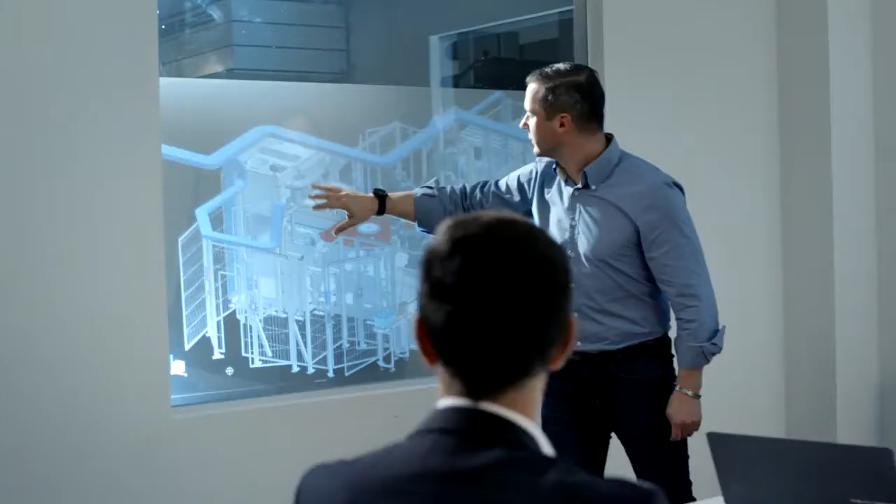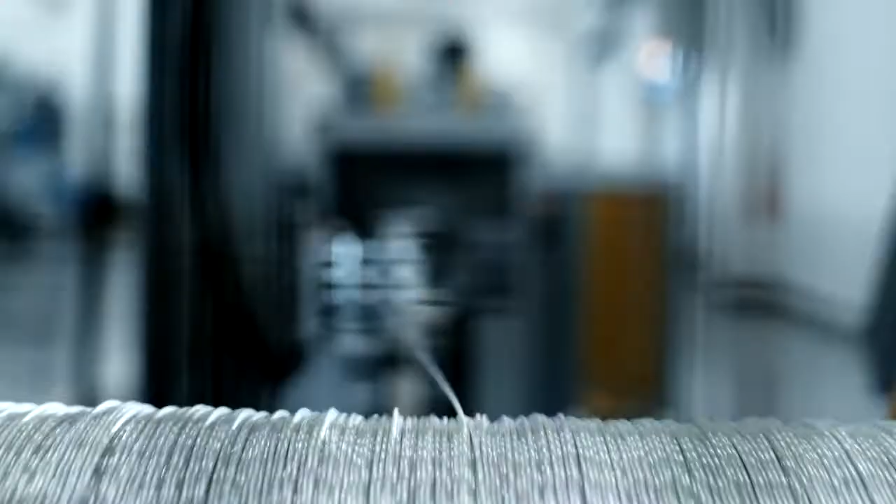Rosendahl Nextrom has 3 business divisions. We provide services for 3 industries. These are the glass fiber industry, the cable and wire industry, and the battery industry. The technology in our sectors is generally at a very high level. In other words, the solutions related to product manufacture are already highly saturated and extremely advanced.

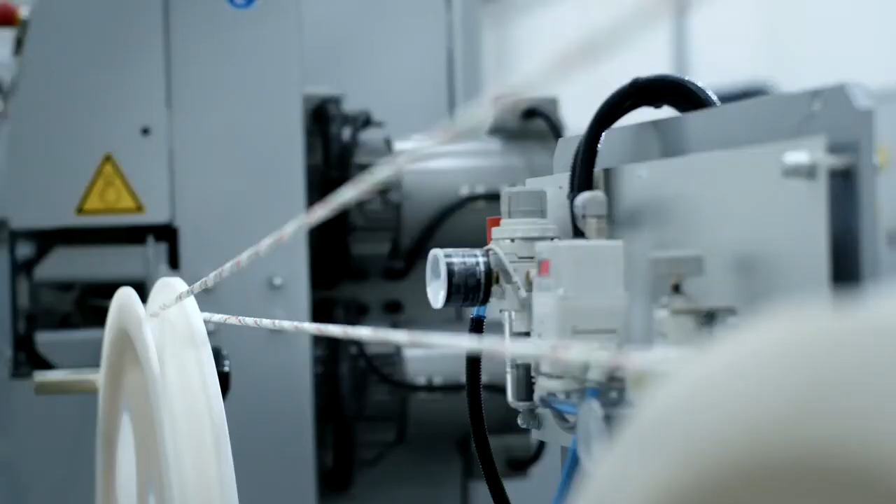And the focus is always on managing fast product life cycles, meeting higher qualitative and quantitative requirements, and keeping pace with competitors' products from low-wage countries. In addition, there's the challenge of simply always finding better solutions.

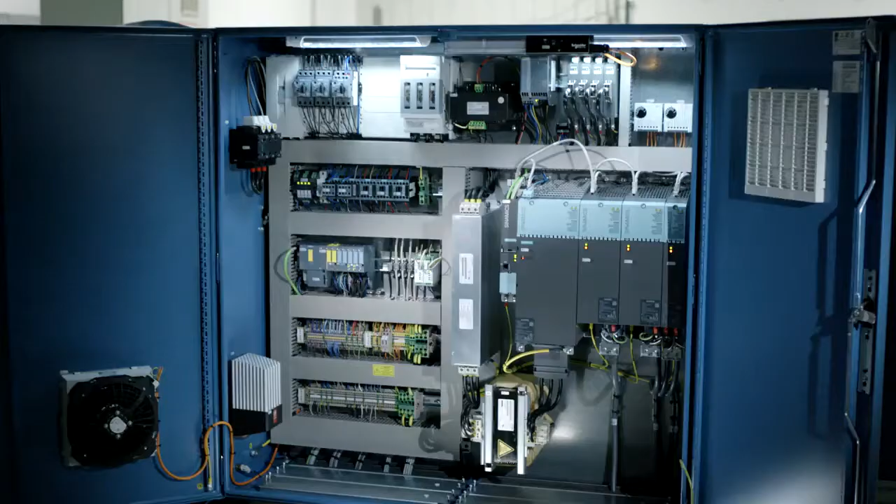We use our skills to combine mechatronic approaches with physics and chemistry in order to generate a better, more efficient manufacturing solution. In the past, we used traditional engineering methods as part of this process, and therefore always reached a limit.

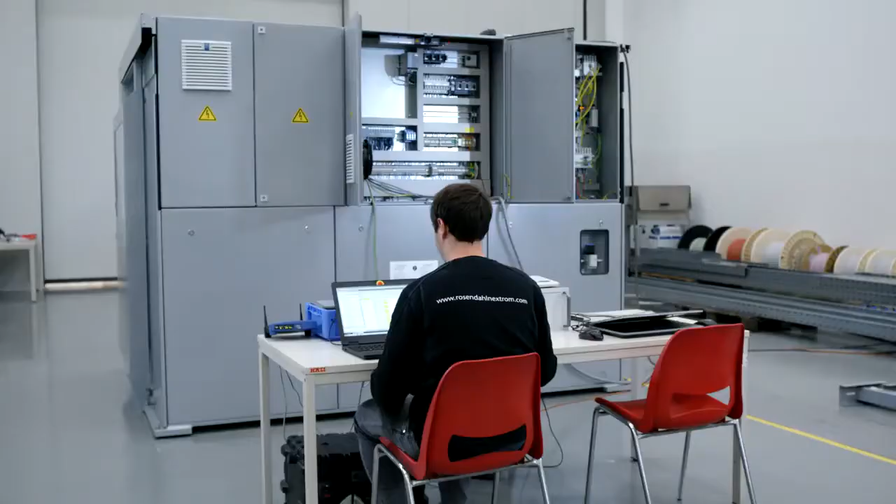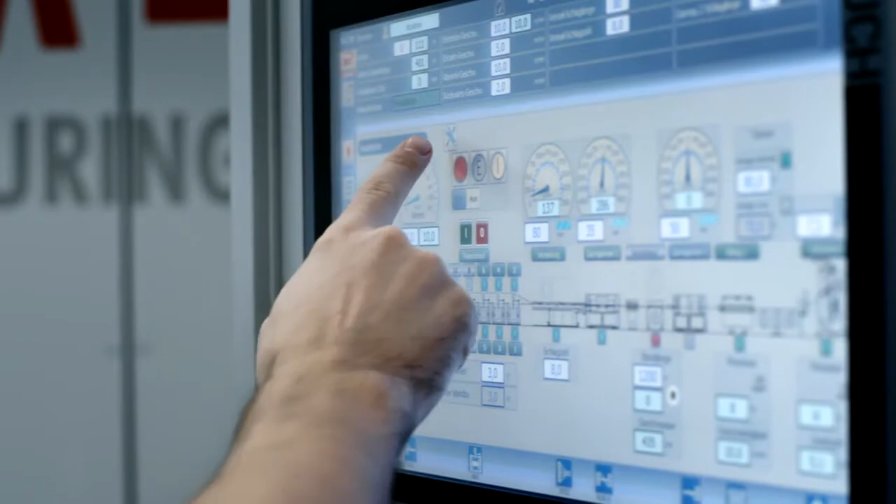Digital capture and simulation make it possible for us to go beyond the limits reached by traditional engineering methods and to create better solutions faster and more cost-effectively. Our digital twin is displayed to a considerable extent in Siemens products. This starts with Siemens NX, 3D construction, so that Teamcenter, which links key data elements together, remains interconnected.

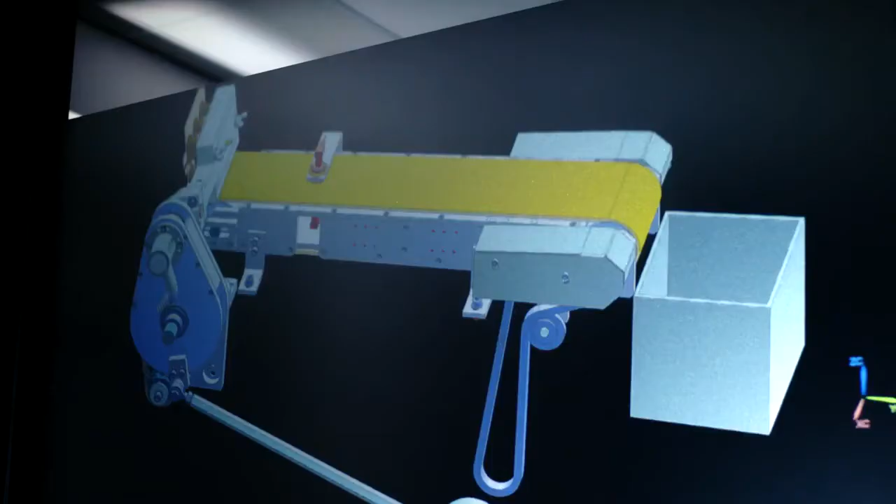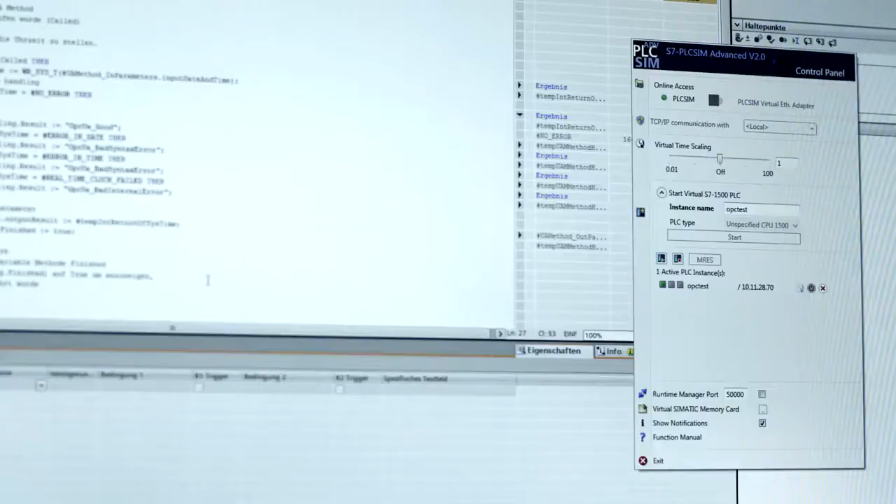We continue to use this in Mechatronics Concept Designer, where we move on to the simulation of the mechanical processes. This is also integrated with automation technology via TIA portal. We use plant simulation. Otherwise, our experts, clients, and other suppliers within the infrastructure can't even begin to imagine how these millions of components and their modes of action interact in the workings of a factory.

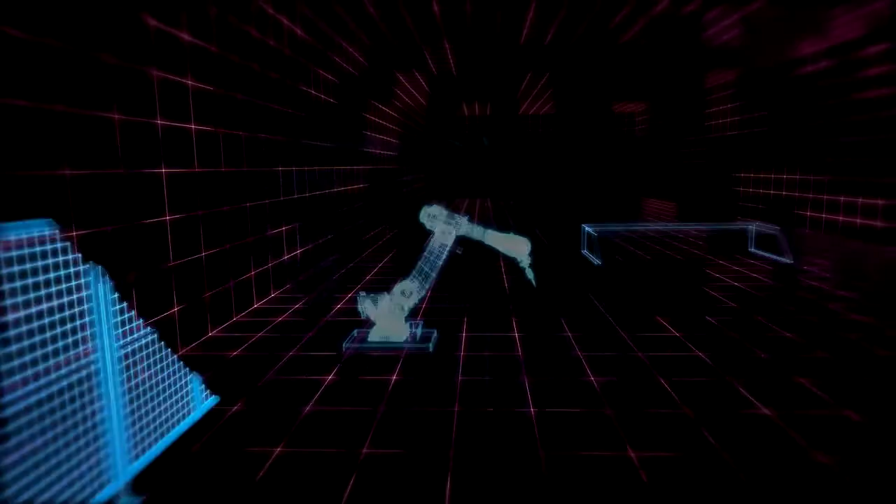We use 3D factory tours to demonstrate the factory concept to clients. A whole new kind of interdisciplinary collaboration takes place across various areas of expertise. The simulation makes it easier to perceive and understand a specific task as a whole, and this support helps our team to generate unique solutions.

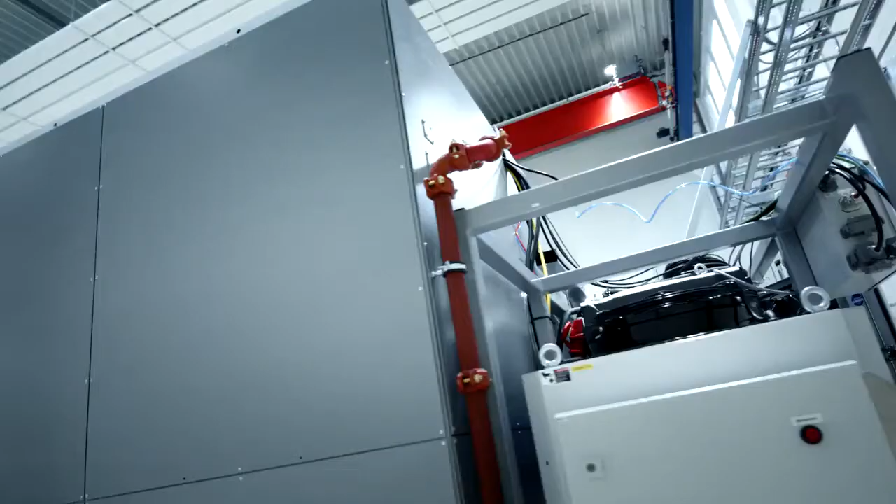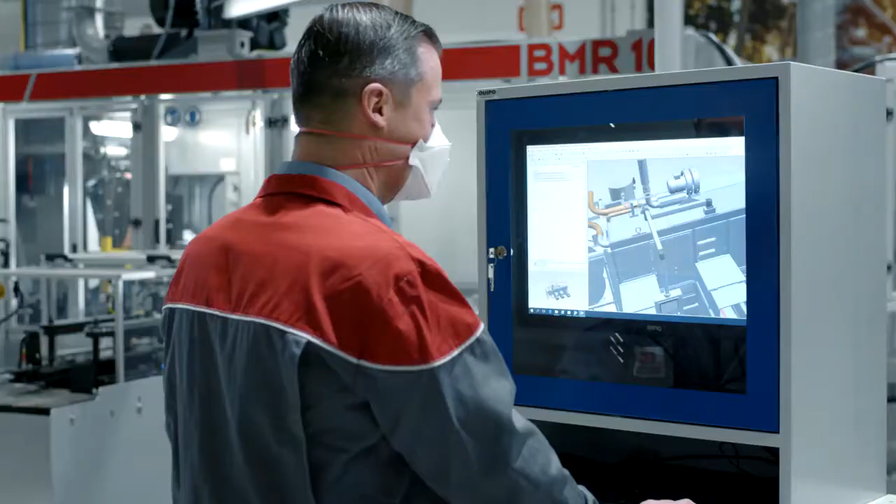Siemens NX is basically a very comprehensive and powerful tool. Its best feature is the connection with Teamcenter, which means that downstream departments can also work well with it. We have, of course, machines that operate incredibly fast. In order to increase their operating speeds, it isn't only mechanical alterations that are required, but also technical automation adaptations.

The Mechatronics Concept Designer has enabled us to adapt existing processes on our machines. In effect, you save between 4 and 6 weeks' work if you simulate it in advance using the Mechatronics Concept Designer. As a result, we are always one step ahead of the competition.

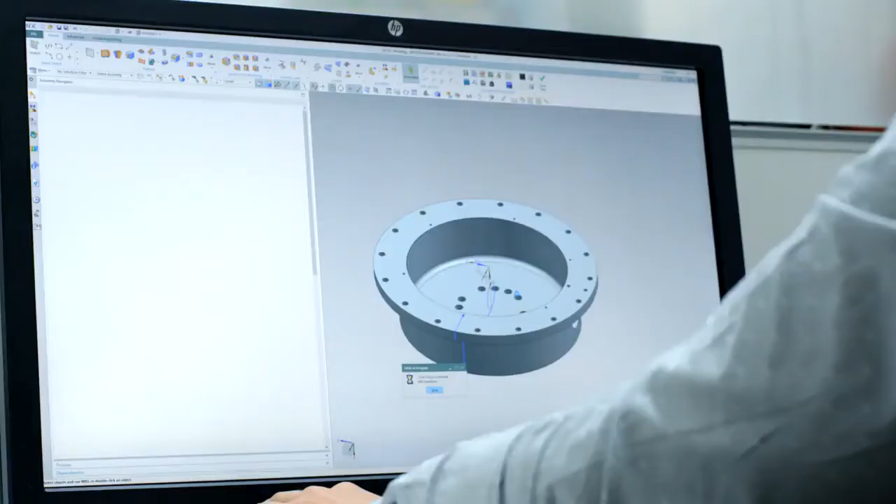In the traditional development process, we used to design a product according to the concept, then build a prototype, learn from that, and use our iterative learnings to build further prototypes until we were ready for mass production. Digitalization and simulation make it possible to leapfrog various stages of development.

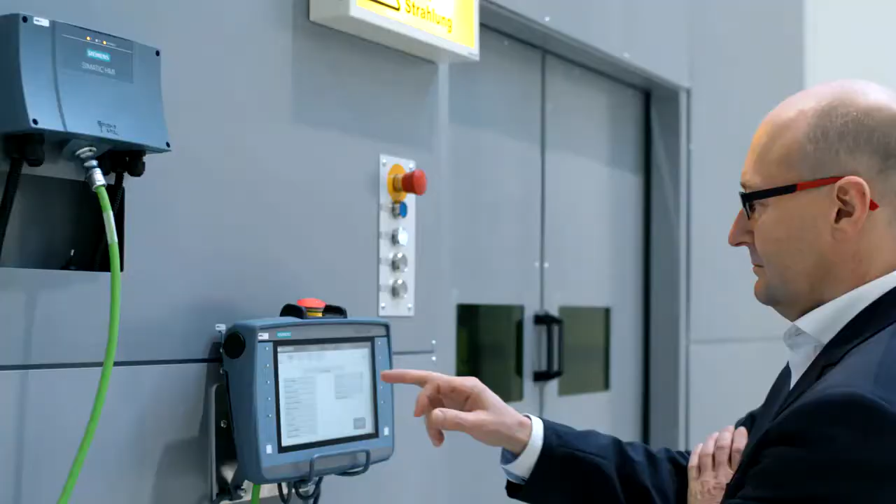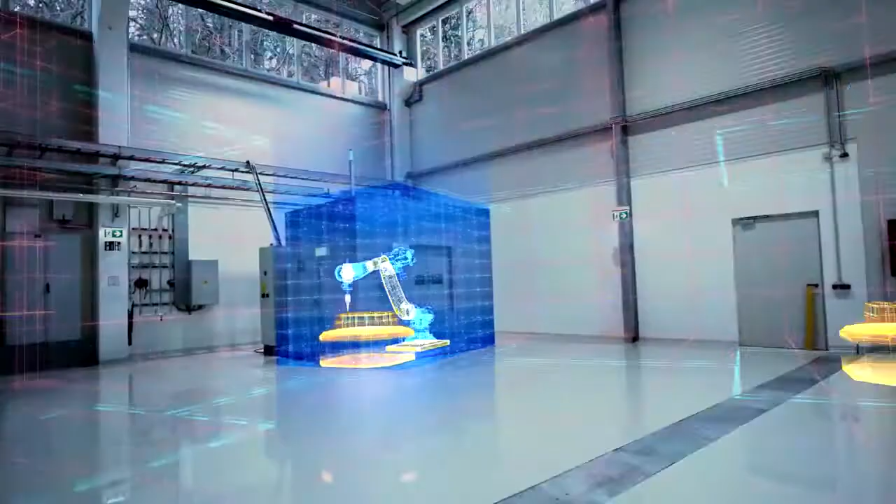We have been able to produce a completely new generation of products within 12 months, where in the past we would have needed a lead time of 18 months or 2 years. And that after 50 years of an industry believing the process had been optimized using traditional methods.